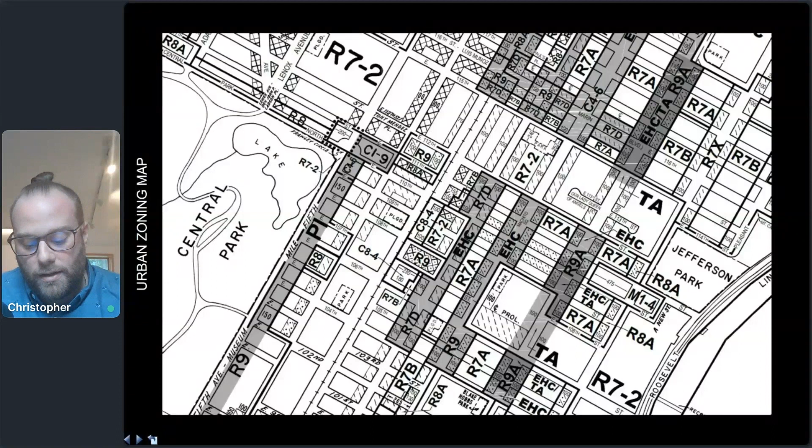So I've got a couple of examples here. This is a zoning map of the Upper East Side of New York City. You could see Central Park on the left there. This is a really dense zoning map as it needs to be for New York City. The regulations in urban areas govern large buildings that are going to be built really close to each other on relatively small lots.

So that's kind of why we need different zoning ordinances, and there's not a single zoning ordinance you're going to need to know about for the purpose of the ARE, because it's different everywhere. It needs to respond to the local community, and usually a local planning board or some sort of governmental body will create the zoning in their jurisdiction that's specific to their needs.

That's very different from building codes. Life safety in this rural area and New York City, it's all pretty much the same. A residential building is going to need the same smoke detectors and carbon monoxide detectors, no matter where it's located, for example, the same egress requirements. So a standardized building code makes sense, whereas a standardized zoning ordinance probably does not.

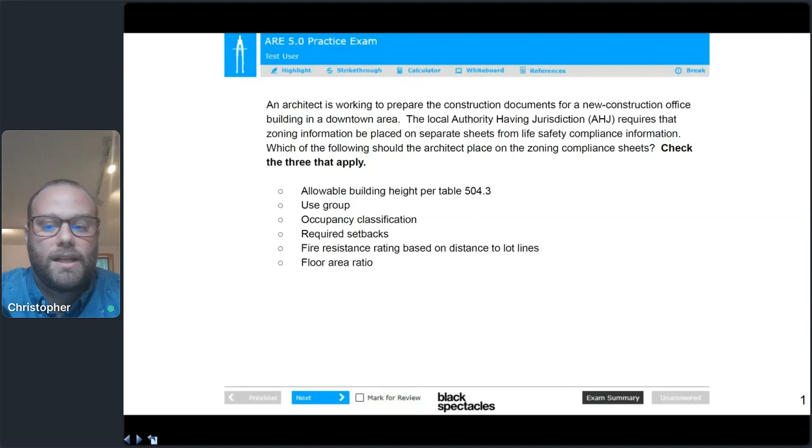So with that little bit of history, we're going to jump into the first question here. And I'm going to turn my video off because I'll be looking down most of the time writing on the tablet here, but I'll return to video when we get to the Q&A session.

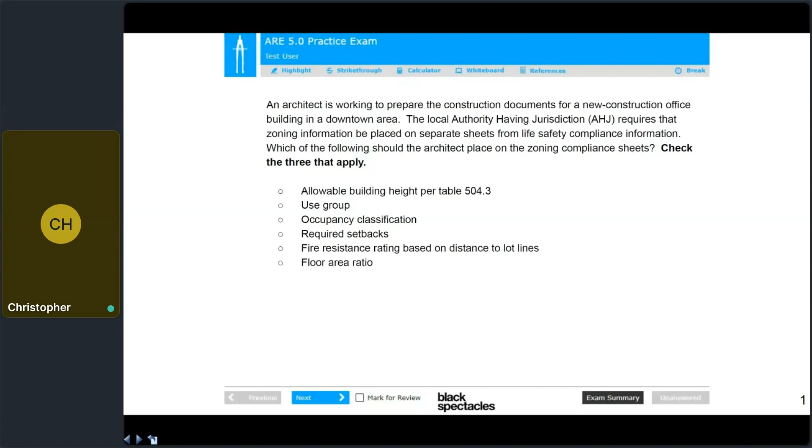So like I said, we've got 5 questions here. I'm going to start by reading the question and then we will go through it. So: an architect is working to prepare the construction documents for a new construction office building in a downtown area. The local authority having jurisdiction, or AHJ, requires zoning information to be placed on separate sheets from life safety compliance information.

Which of the following should the architect place on the zoning compliance sheets? And we're going to check the 3 that apply. So this question really gets at what I was just talking about, the difference between zoning and the building code and what's covered specifically here under zoning ordinances. And we'll talk through some of these answers, and sometimes something is covered by both, but in different ways and from a different perspective. So let's go through these answer choices here.

So the first one, allowable building height per table 504.3. I think this one seems correct. We just talked about how zoning governs how big a building can be. If you're reading this, you might see the word height and think that height's definitely governed by zoning and move on and mark this as correct. But you need to be sure to read the entire choice here.

Specifically, table 504.3 is a building code table. And that table considers the occupancy classification, which is a building code term, not a zoning term, as well as construction type and whether or not the building has sprinklers to figure out how big the building can be. From a life safety perspective, that's all about not having a really big building, for example, built out of combustible wood construction that's going to be a fire hazard for the occupants inside, and also be really difficult for firefighters to manage the fire if there's a disaster there. So while this may seem correct, this is really talking about allowable building height in the building code. So we're going to mark that as incorrect.

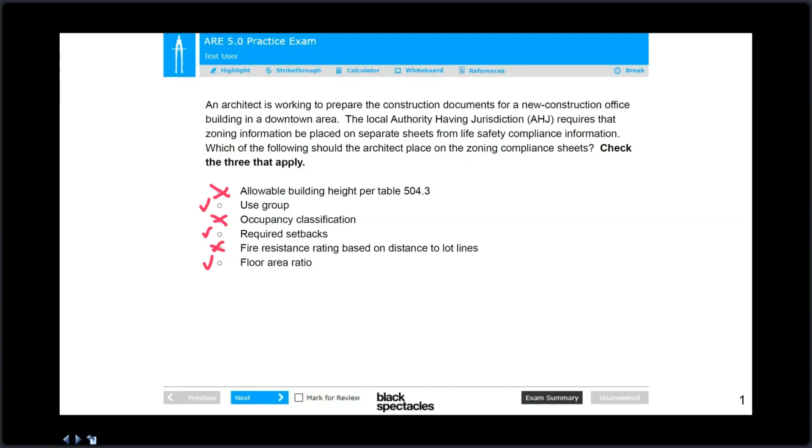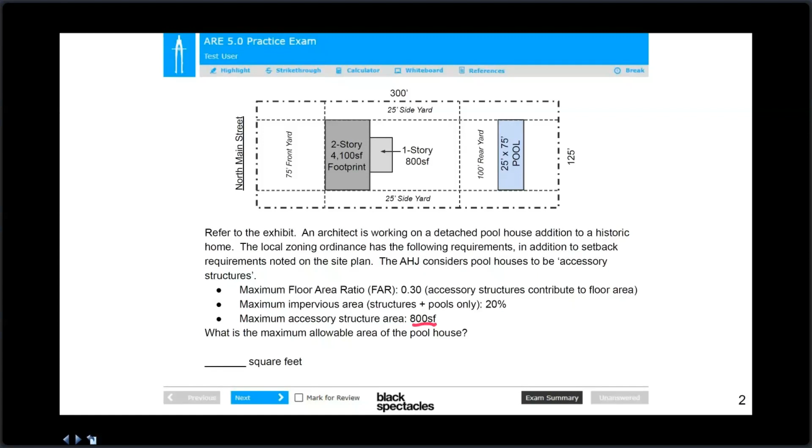We'll move to the slide so I have more room to write. We need to analyze both the floor area ratio and the impervious area to determine which, if any, is lower than the 800 square foot absolute requirement, and then figure out how big our pool house can be. Starting with FAR first.

We'll first find the maximum allowable total FAR, and since the existing house uses some of that FAR, we need to subtract the existing floor area from the maximum allowable floor area to find what's left over, which would be allowed for the pool house. This is a pretty common calculation you'd do on an addition project or when building an accessory building on a lot.

First, the allowable floor area, remember, is the lot area, which in this case is 300 feet times 125 feet. Then we multiply that by the floor area ratio of 0.3. That number comes out to 11,250 square feet.

But remember, that's the maximum allowed total on this site, and we've got an existing house that's going to stay. So we now need to find the existing.

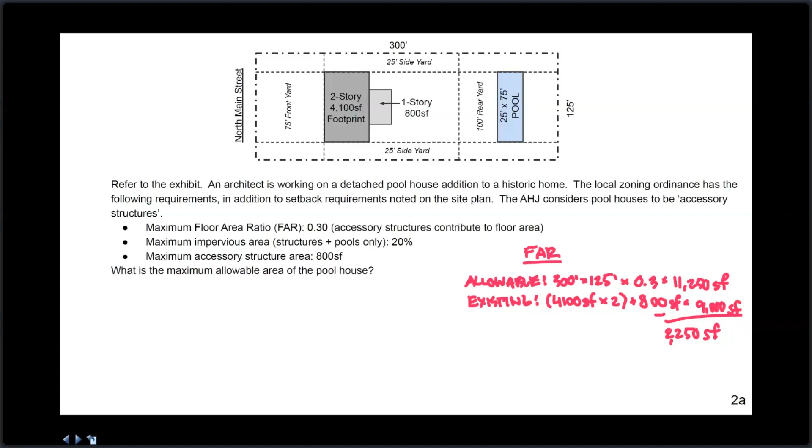So this floor area ratio requirement is not going to govern the size of it. In order to comply with both of those, you would need to build a maximum size pool house of 800 square feet. So this is not the correct answer, but we still need to look into the maximum impervious area, which in this question accounts for both structures and the pool.

We're going to use a very similar strategy. We'll find the maximum allowable first, then subtract out the existing to find what's allowed to be used for the pool house. So allowable is the lot area, which is 300 feet times 125 feet times, in this case, 20%. That is going to equal 7,500 square feet. Sorry, just checking my notes here.

Then we'll find the existing, which is a little different calculation than we did for floor area ratio. For floor area ratio, we took into account the 2-story portion and doubled the footprint of the house. Here, we're just talking about impervious area, so that's really just the footprint of everything on the site. So we're only going to count that 4,100 square feet once.

So existing is going to be 4,100 plus the 800 plus the pool, which is 25 feet by 75 feet, which comes out to a total of 6,775 square feet of existing. So again, if we subtract 7,500 minus the 6,775, we'll come up with an allowable—sorry about that.

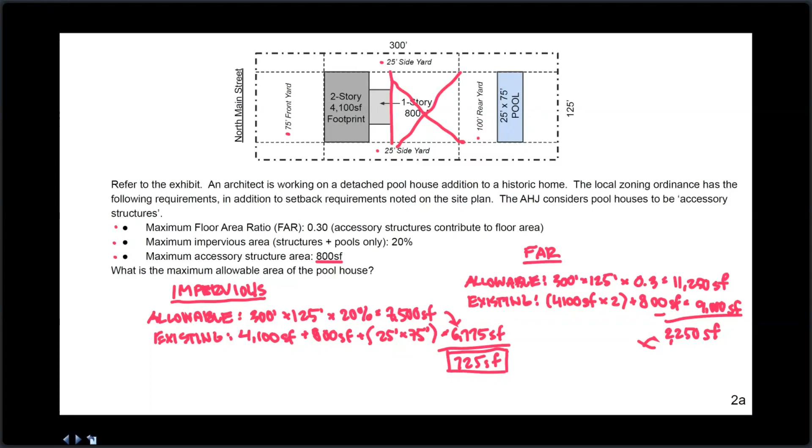So I would say don't stress over this information being provided and not being used. It's very common on the ARE that happens, and in this case, it is not applicable.

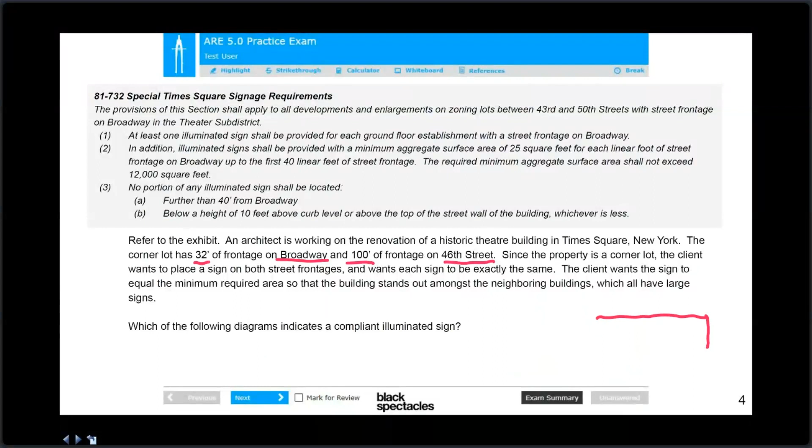So it doesn't matter what orientation we sketch this in, but I am going to draw it this way. Broadway here with 32 feet and 46th Street here with 100 feet. This is not a real scenario. 46th Street and Broadway is the New York Marriott Marquis Hotel, but just a fun site to consider for this kind of unique zoning ordinance here. So let's read the exhibit with this site in mind.

So this is the special Times Square signage requirements. The provisions of this section shall apply to all developments and enlargements on zoning lots between 43rd and 50th Streets with street frontage on Broadway in the theater sub-district. Well, we are between 43rd and 50th Streets. We're on 46th Street, and we do have frontage on Broadway. So this does apply. This sentence is really important in a zoning ordinance to tell you if something applies to your situation or not.

On the ARE, you're often going to get an exhibit that's provided that is totally not applicable to your situation. So for our purposes here, I'm glad that we read it and we're thorough, but this section definitely applies to our question here.

So number one, at least one illuminated sign shall be provided for each ground floor establishment with street frontage on Broadway. Again, that's just saying that a sign is required. The question already says that the client wants a sign. So kind of irrelevant. It's not telling us any information about what a compliant sign design might look like, which again, when you're reading this exhibit, always remember the question we're looking for, and I'll just give a preview of what the diagrams look like here. We're looking for a compliant sign design.

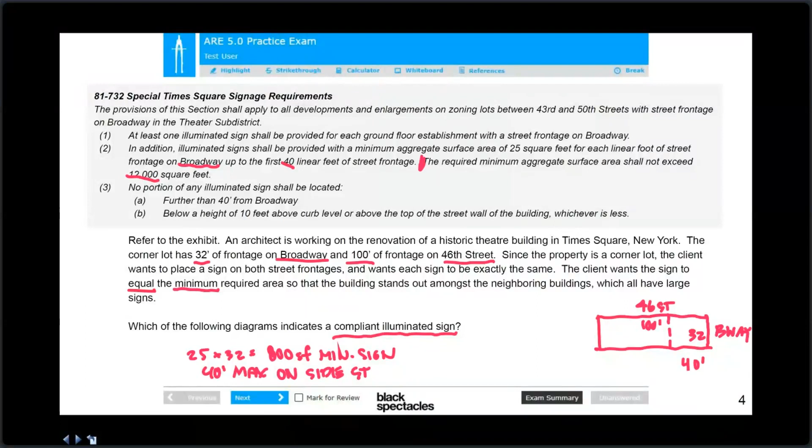Finally, reading requirement 3, no portion of any illuminated sign shall be located further than 40 feet from Broadway - so 40 feet maximum on the side street. Looking at the site plan, somewhere in here is going to be 40 feet since the lot is 100 feet. You could start to imagine the sign is going to be somewhere like this on the corner, and we don't quite know how big it is. It could be all the way to that 40 feet mark, but it can't pass this 40-foot mark - that's important.

And just to close this out with part B, the sign cannot be below 10 feet above curb level or above the top of the street wall of the building, whichever is less. Looking at the choices here, I've got some notes that summarize this well. That last requirement is simply saying no sign can go above the street wall, and they cannot be below 10 feet. None of these dimensions are below 10 feet anyway, so it's not the most relevant requirement. With a question like this, you'll spend a lot of time figuring out the requirements, but then just looking at these choices, the answer is relatively straightforward.

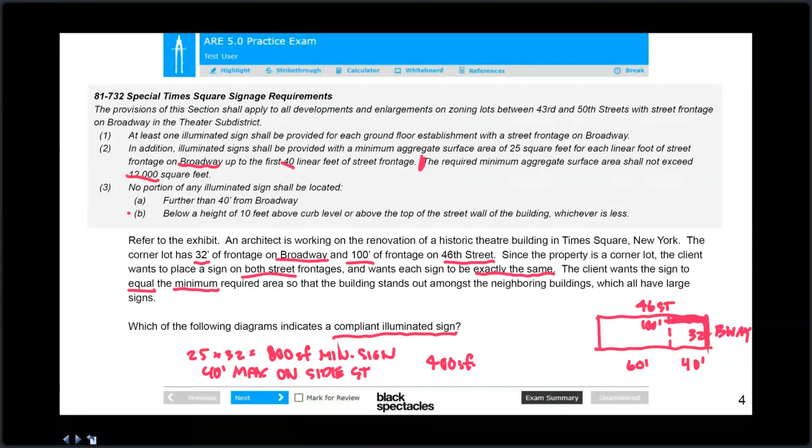So remember, we came up with 800 square feet minimum for the sign, and we said the client wants the sign on both street frontages, with the exact same sign on both. So if we've got 800 square feet minimum for the total sign, and we're doing an L-shaped sign, we want a 400 square foot sign on 46th Street. We'll keep that in mind.

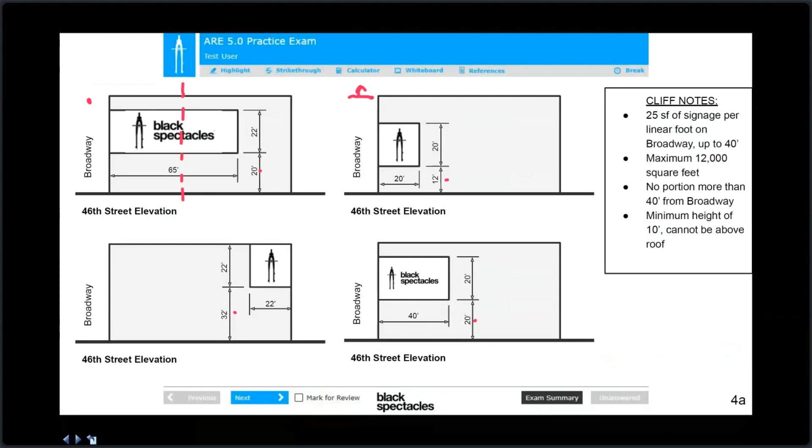Just looking through these choices, the first option here is way bigger than 400 square feet - 65 by 22 is huge, and the 40-foot dimension from Broadway is probably somewhere in here, so this whole area of the sign is not compliant. This option is incorrect. Option B looks pretty good because a 20 by 20 sign is going to be 400 square feet. We know the sign is only 20 feet off Broadway, so that 40-foot line is somewhere here - that's compliant, and we are 12 feet above the street height, not above the street wall. So I would go with option B as the correct one here.

We can talk about the last two and why they are incorrect really quickly. The lower left option here has a couple of reasons why it's incorrect. One, the total sign is away from Broadway - you would need a sign somewhere in this area to be compliant with the zoning requirements. This one is way off the corner and not compliant for that reason. It's also a little bigger than the client wanted - they want the minimum allowable sign size, so that one's incorrect.

And then the last one is actually compliant with the zoning resolution. You've got this 40-foot number - it's 40 by 20, so it is 800 square feet, so it meets the minimum requirement. It meets the height requirements, 20 feet and below the roof, but it doesn't meet the client's requirements.

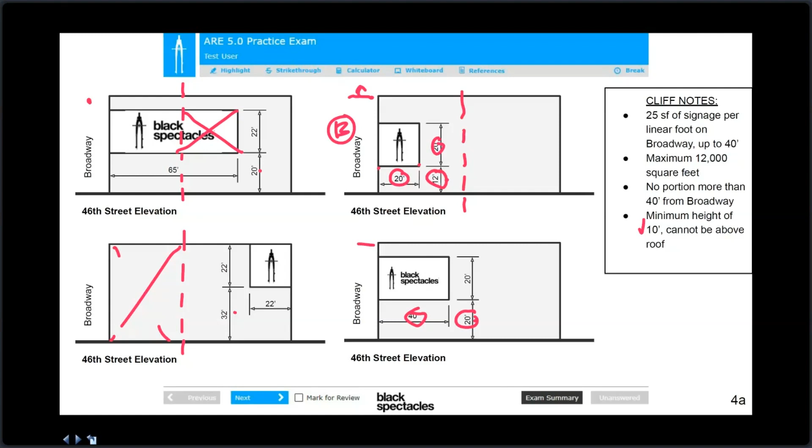This question is asking you to consider both the client's requirements and complying with zoning. That's why B is correct and not D in this case. The two options on the left comply with neither the zoning nor the client's requirements. So it's just a fun question about signage with our black spectacles building in Times Square.

So we'll go to the last question here before Q&A, and this one is kind of a long one. I'll read the question and then we'll talk about how we approach it.

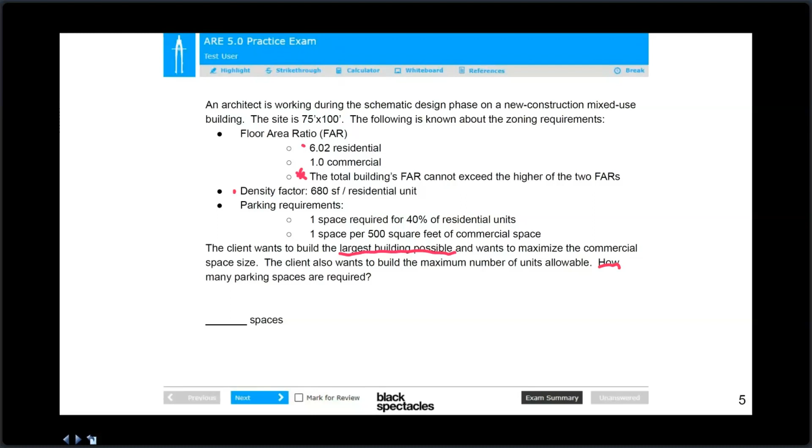So it's going to be confusing about where to start on a question like this, since we just read all of it. Even though I read this forwards just for the sake of discussion today, if I was taking the exam I would have read the question first: how many parking spaces are required? You can also note that the fill-in-the-blank question is asking for a number of spaces, and work backwards. So how are we going to figure out how many parking spaces are required?

In the third bullet, we know that one space is required for 500 square feet of commercial space. We know the client wants to build the biggest commercial allowable, and we've got a 1.0 commercial FAR, so that one should be relatively simple to figure out. We also see in the last bullet that we've got one space for 40% of the residential units. Again, with that density factor and the FAR and the lot size, we should be able to figure out how many parking spaces are going to be required for this building.

I'll move on to my next page here with some cliff notes and a little bit more space for me to write. Let's start with the residential because it's a little more complicated. We need to first figure out the FAR. We've got a 75 by 100 foot site, that's a 7,500 foot site. And remember, we've got a 5.02 residential FAR.

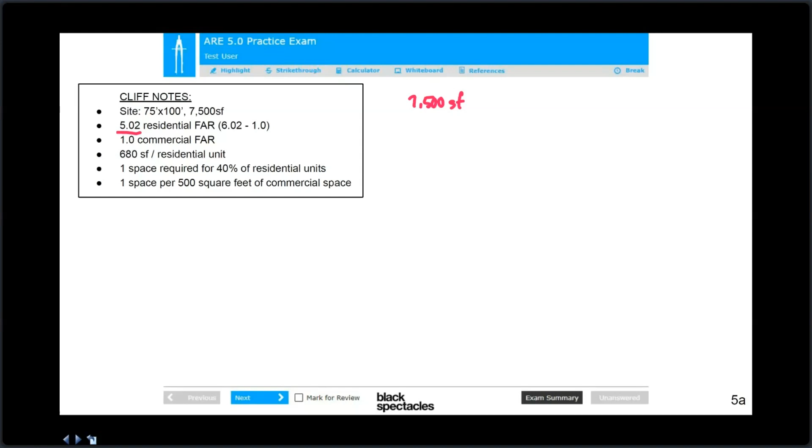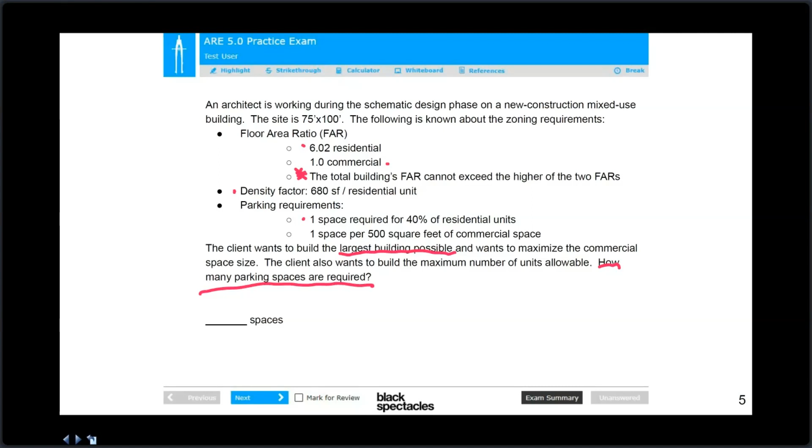That is the actual residential FAR of 6.02 minus 1 for the commercial. That's because of the note that the total building has to be 6.02 or less, and that the client is going to want to build that 1.0 of commercial space. So that's an easy place to trip up on this particular question. So we're going to multiply the 7,500 square feet by 5.02, and we're going to come up with 37,650 square feet.

So now we know how many square feet the residential building will be. Parking is required for a certain percentage of the units. We're going to need to use that density factor to figure out how many units we can have, and then finally how many parking spaces those require.

So if we take 37,650 and we divide that by the 680 square feet per unit, we are left with 55.36 units. Since we can't have a fraction of a unit, we're going to need to round down here in order to comply. 55.36 is the maximum.

If we provide 55, we're compliant. If we provide 56, we are not. So we are going to have 55 units. Finally, we can take that 55 units and multiply it by 40%. One space is required for 40% of the units. So 55 times 40% is going to equal 22 spaces for the residential only. This is residential.

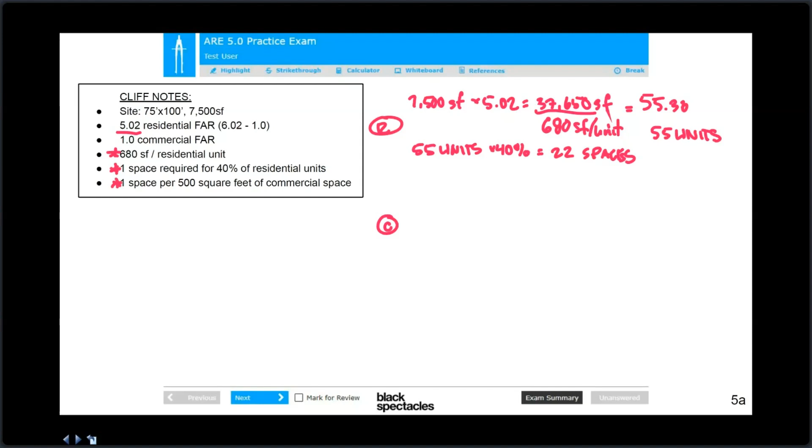And I'm going to underline that 22 spaces, so I don't lose it. So 7,500 square feet. The FAR is 1, so I probably would not do the math on the area to save some time. So 7,500 square foot lot with a 1 FAR is a 7,500 square foot commercial space. And we've got one space per 500 feet. So 500 square feet per space. And that equals 15 spaces.

So if we simply add up 22 spaces and 15 spaces, we get 37 total spaces required.

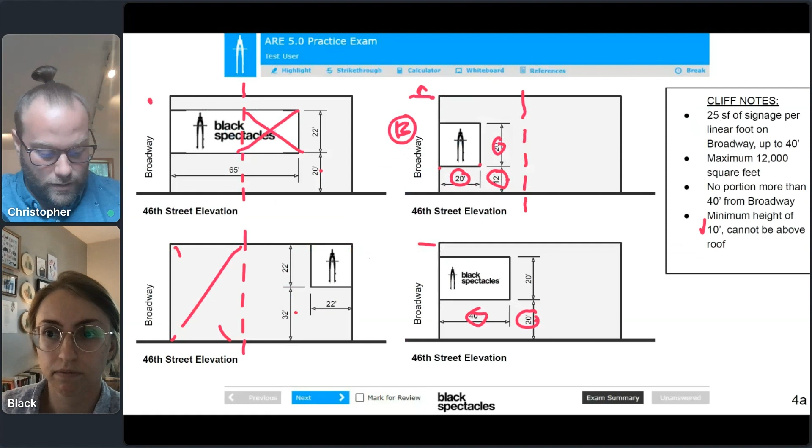Sure, yeah, let's just do this one at the top here. So in the second question, why did we have the first calculation? Let me get back to that one. If I remember correctly, I did the floor area ratio calculation first. So I guess what's being asked here is why did we do that calculation if it didn't end up governing how big the pool house could be? And I think the answer is that we couldn't have known that it doesn't govern how big the pool house is going to be until we went through that exercise.

So even if you started the opposite way, if you started with impervious area first and you came up with 725 square feet, that's not necessarily the correct answer just because it's less than the 800 square foot absolute maximum. You still would need to check the floor area ratio because, for example, if this floor area ratio was 0.10, that would probably make floor area ratio then the governing thing here that governs how big the pool house can be.

There's no, I know a lot of people ask about rules of thumb for things, or for certain question types. There's no rule of thumb for this. You need to, just like when you're doing a zoning analysis in your office, go through all of the requirements and figure out which one governs your situation. You can't look at a question like this and say, oh, it's about an accessory structure, so impervious area is going to govern. That's just not how it is.

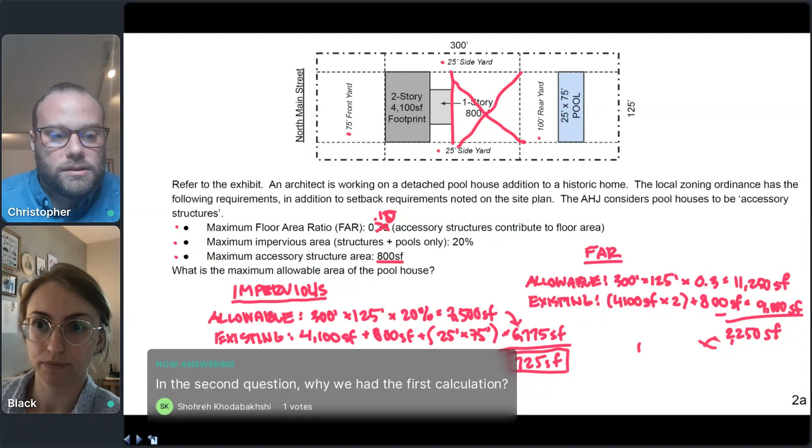Let's see, I'll just keep going through these then. What's the difference between use group and occupancy classification? So I touched on this a little bit in the beginning, but use group is a zoning term and occupancy classification is a building code term. There's a lot of confusion about these two because they are very similar.

I think you just need to remember the vocabulary terms here, that use group is related to zoning. I don't know, maybe like the letter U is pretty close to the letter Z in the alphabet, so you can remember it that way. And occupancy classification is related to the building code. I guess O is closer to B, so you can remember it that way. I just made that up. But otherwise, they're pretty similar. I mean, use group is just the term that zoning ordinances tend to use to talk about how a space is used. And again, they're mostly concerned with having compatible uses near each other in neighboring buildings.

If you think about any place you've been to that has zoning, there's usually neighborhoods with relatable things near each other. Take New York City: the East Village and West Village are very residential, with commercial areas on main streets that tend to be wider. Midtown has huge offices, so does the financial district. That's not by accident - the zoning in those areas says you can build offices in Midtown and residential in the villages. So zoning uses use groups for those purposes.

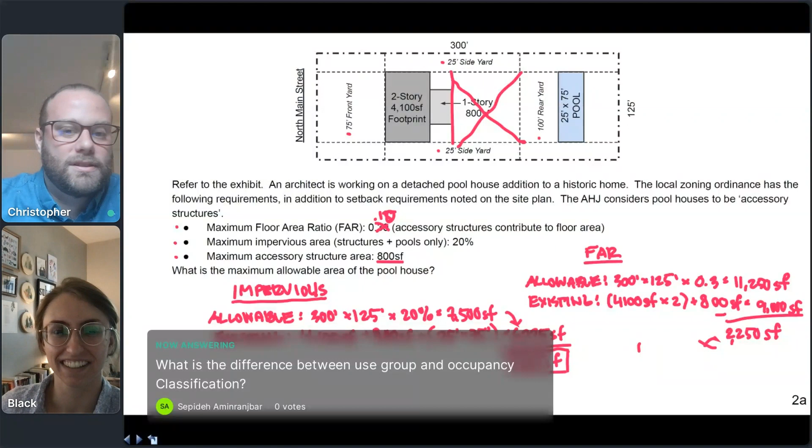So that's kind of the short answer, maybe not so short, about how they're different. Try that mnemonic device I made up to remember it - mnemonic devices are very helpful for me.

All right, why did I subtract 1 from 6.02 in the last question? I was expecting this question, so I'm ready for it. I tried to star this heavily to avoid getting the question, but it's okay, it's confusing. It comes down to the point that the total building's FAR cannot exceed the higher of the two FARs.

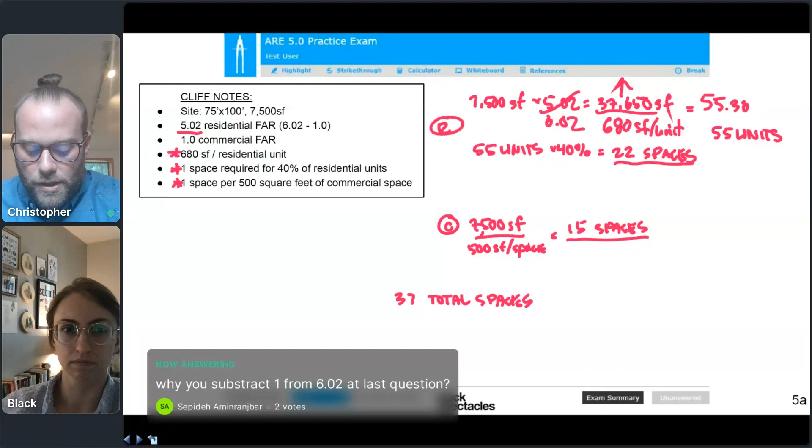So if we multiplied the lot size by 6.02, we'd get a higher number for the total residential FAR. We'd then have 7,500 square feet for the commercial portion, which would result in a building that was too big. Basically, if you make this 6.02 and this 1.0, the total building's FAR would be 7.02 and therefore not comply with this provision right here.

This is really common in mixed use districts, which are super common in large cities where you'll have commercial space on the ground floor and residences above. You see that all the time, particularly on main streets in cities. It's just a way zoning ordinances typically work, because some people might build a fully residential building here.

So they might build 6.02 FAR totally residential. Some people might build 0.5 FAR of commercial and 5.52 FAR of residential - that adds up to 6.02. It gives you some flexibility, some design flexibility to the architect as to how you divide these allowable FARs, while still protecting the idea that whoever put the zoning ordinance together doesn't want buildings bigger than 6.02 in total.

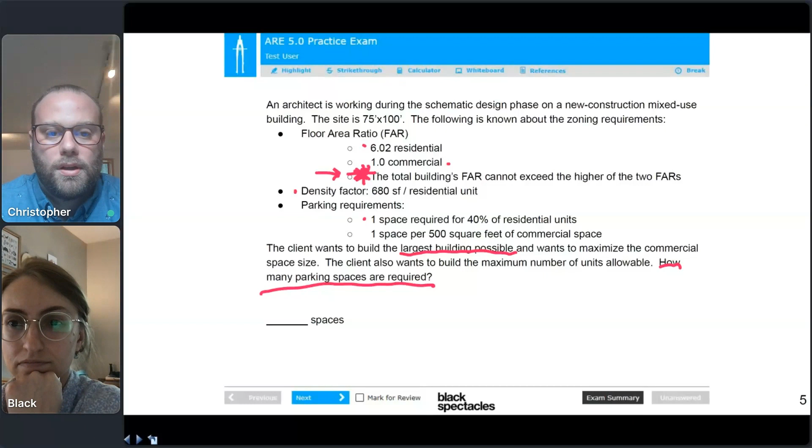Okay, so that's that one. Thank you for that question. Let's do this one from Jonas: why in the first calculation was the pool not calculated, and it was in impervious areas? Good question.

Pools typically are not - I'm not aware of a case anywhere where they are part of floor area - because they don't physically occupy a space, they're in the ground. Similarly, basements and cellars usually aren't part of floor area because they're below grade. Remember, the point of a zoning ordinance is to control how a building is perceived from the street - how big it is, how big of a shadow it casts, and what types of uses are involved. So below grade stuff doesn't contribute to floor area, which is used to govern how big a building is.

Just a point of clarity here. If you're looking at a zoning ordinance, usually there's a definitions section that defines floor area in a really long definition telling you exactly what is and is not included. That definition in New York City is super long. So the ARE can't really do that unless it's a case study question that provides large excerpts from a zoning ordinance. What I had to do when writing this question was try to paraphrase what you should and should not include.

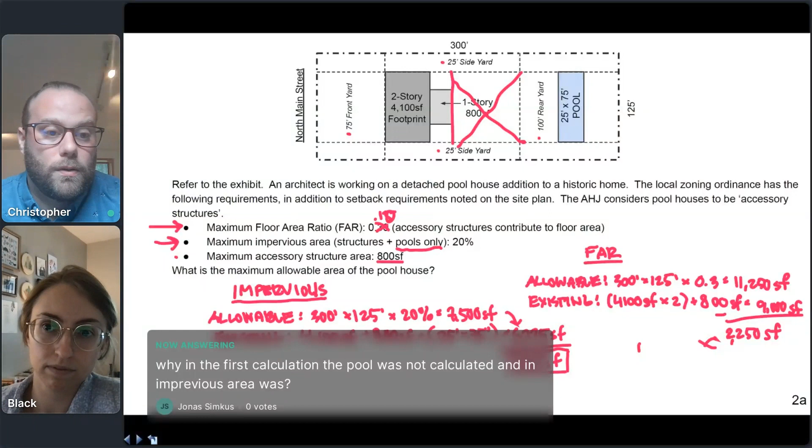We got a little follow-up question: do porches and balconies count in floor area? Great question - sometimes yes, sometimes no. It depends on who wrote the zoning ordinance and what they were trying to achieve. I've done a number of projects in the Hamptons, and some towns count covered porches, some don't. In real life, you need to look at that definition, and if you're working in a municipality you don't usually work in, make sure you don't have a memorized definition of floor area, because it might not apply there.

For the ARE, they should do what my question here did and spell out what's included and what's not. If they don't, I would probably not include a porch. I guess it's not really a fair question if they don't tell you, but the most basic definition of floor area is the area of the building itself. So stick with that if you get a frustrating question that doesn't define it, but I hope that doesn't happen.

All right, I think maybe we have time for one more quick one before we wrap up. Let me scroll through here and see if there's anything - none of these are upvoted, so I'm gonna pick one.

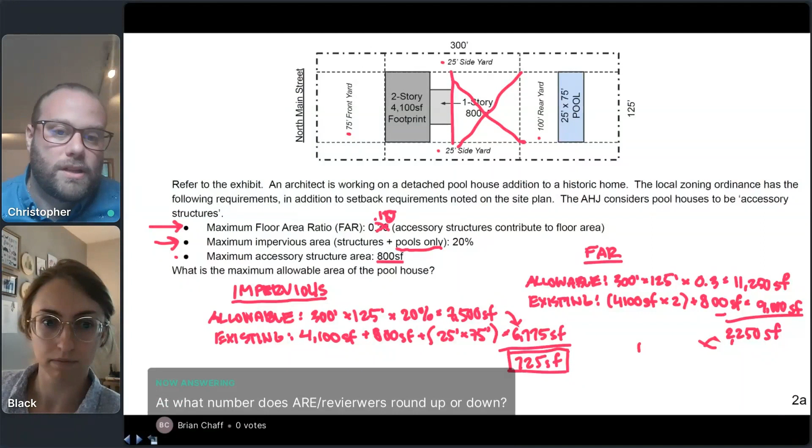We had a couple of questions about rounding, and we did some rounding today, so I'll address that quickly. Let me find one of the examples where we rounded - I think it was the last question. So yeah, here: 55.38 was the actual number we came up with for the number of residential units allowed on this project, and we rounded that down.

It so happens that mathematically you should round that down anyway. But even if this number was 55.99, we would need to round down in this case, because what this is saying is that the absolute maximum the zoning ordinance is going to allow is 55.99 units. So 56 is not allowed - it's simply higher than 55.99. So you have to round down.

The same is the case for egress requirements. If your egress calculation is telling you that you need 50.01 inches of width, just making this up, that's the minimum, so you need to round that up. I mean, you could make it 50.01 I guess if you wanted, but I would do at least 50 and a quarter inches, probably 51 inches if you're not doing fractions.

I would say there's not really a hard and fast rule on this - you need to use some logic and think about what the requirement is really getting at. If it's setting a factor for number of units, for example, it's setting a maximum, so you need to be below that maximum. If it's for egress, it's setting a minimum required width, so you should round that up. So I guess there is a rule of thumb: you should round the opposite way of the intent of the requirement.

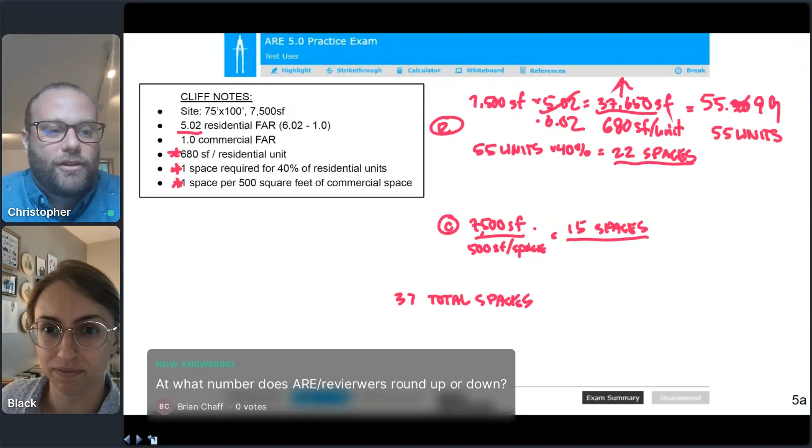Awesome. Cool. Okay, we are at time, so that is it for today, I think.